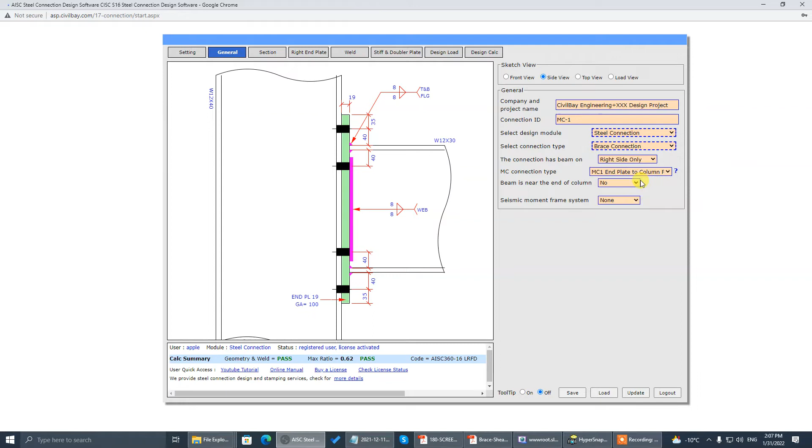We'll do this vertical brace first. Look at this angle: the brace to horizontal angle is 39 degrees, and to the vertical line the incline angle is 51 degrees. We will start and go to brace connection. The brace is bottom only, double angle vertical brace. As I say, the brace line to vertical line incline angle is 51 degrees.

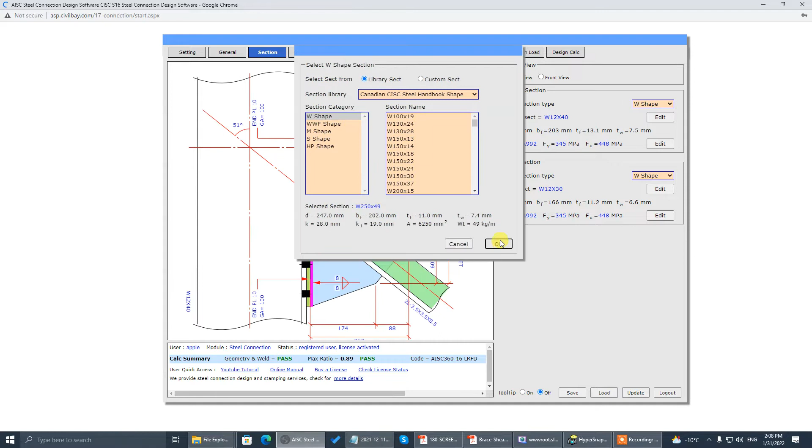Go to section. The column section is Canadian W250x49, and the beam section is W200x36.

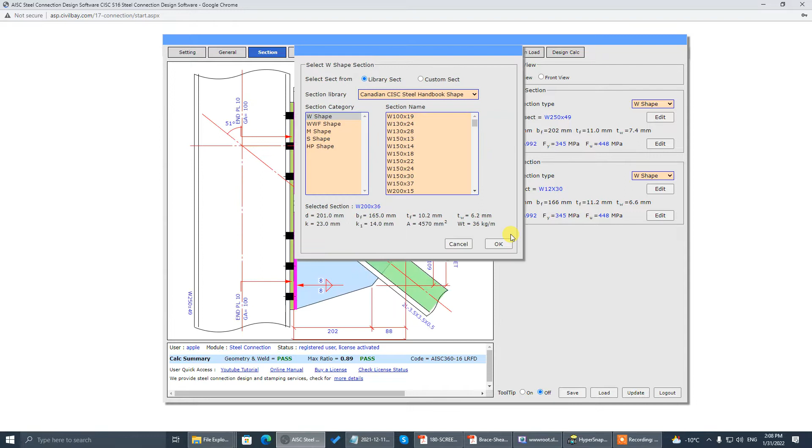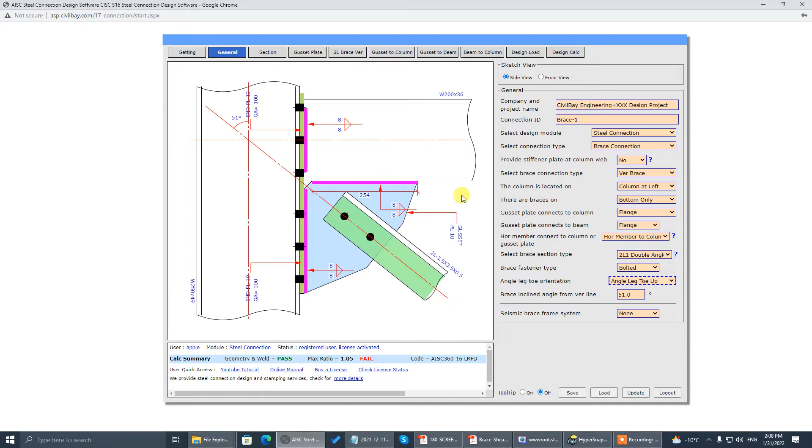Go to general. Basically we want this flange to be on top, toe up, change this one the flange on top, and now go to angle section.

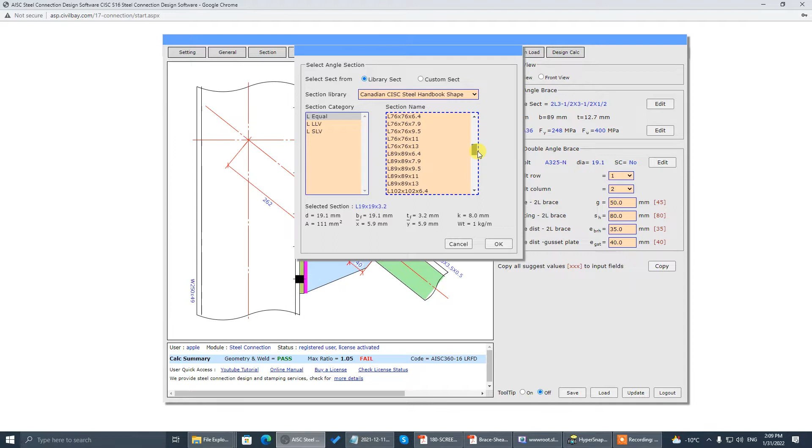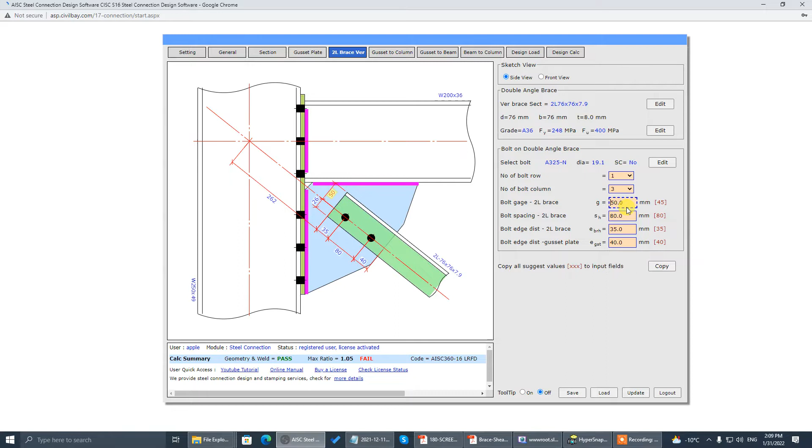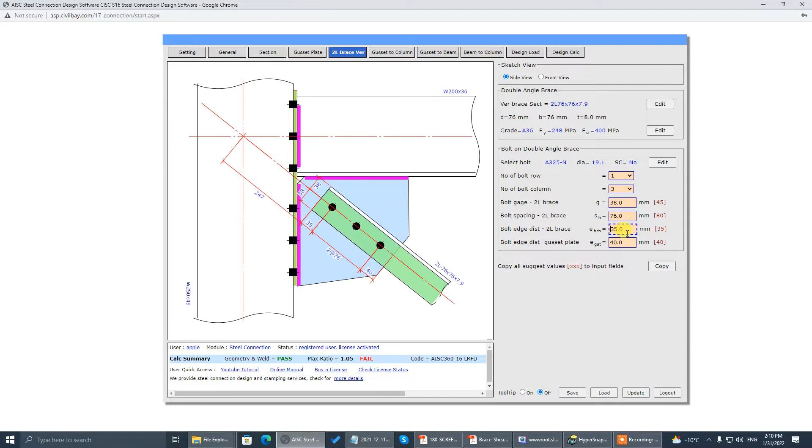The double angles are 76 by 7.9, Canadian section, L76. The gauge is 38, we have three columns, gauge 38, edge distance all 38, and 76 spacing throughout all three columns of bolts.

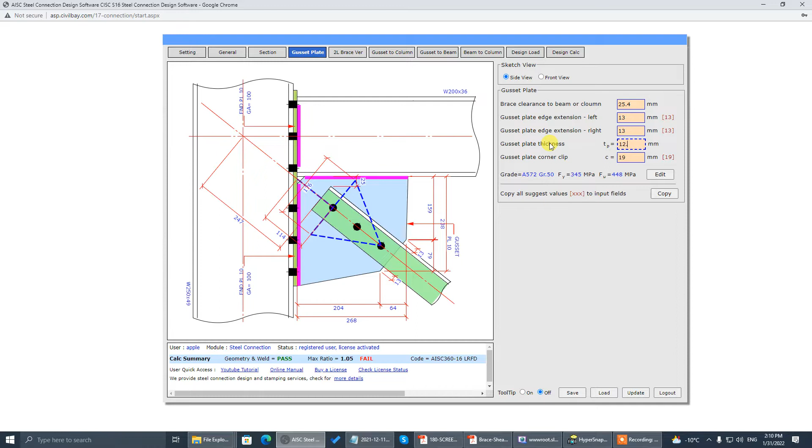Go to gusset plate. The gusset plate thickness is half inch. The edge extension is 13, the clearance is 25. So we copy everything: clearance 25, 13, 13, thickness half inch.

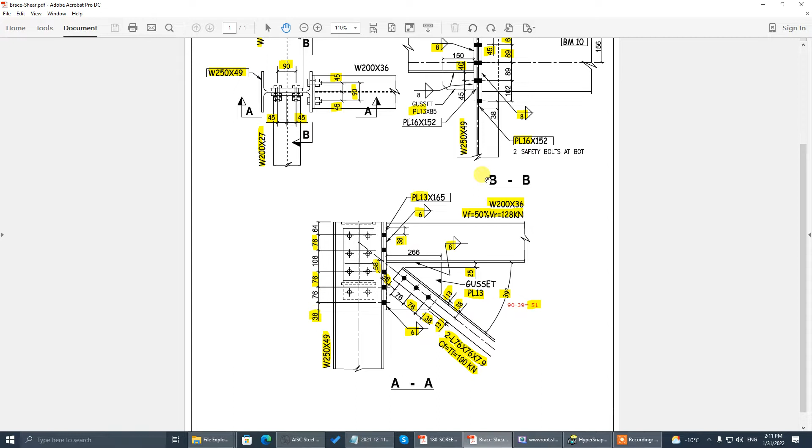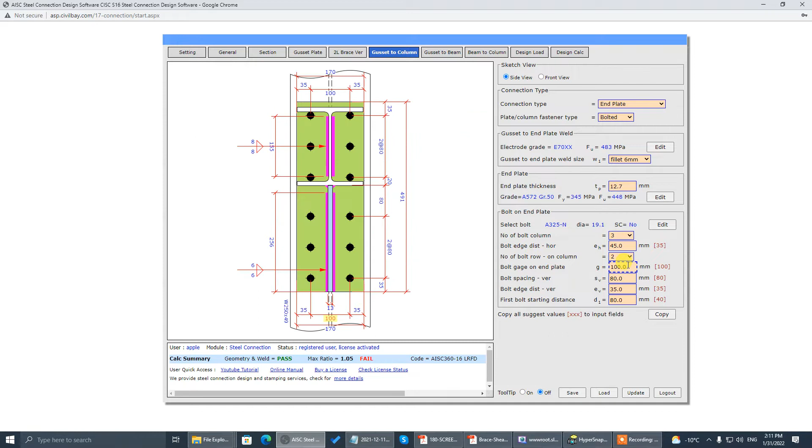Now go to this gusset-to-column connection: three rows of bolts, spacing 76, edge distance 38, gauge is 90/45. The weld to column is 6mm. The end plate thickness is half inch, with 3 rows at 45, gauge 90, edge distance 76, other edge distance 38, and that distance is 58. Update, half inch.

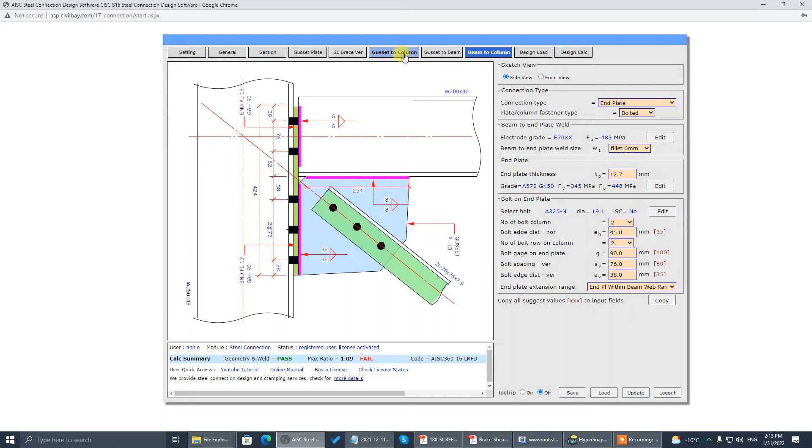Go to the beam-to-column connection. The spacing is 76, 2 rows of bolts, edge distance 38. The weld is 6mm as well, 2 rows of bolt instead of 3. Gauge 90, spacing 76, edge distance 38. Update. Go to the gusset-to-beam connection, we copy: it's 8mm, flush this one, copy this, flush that one.

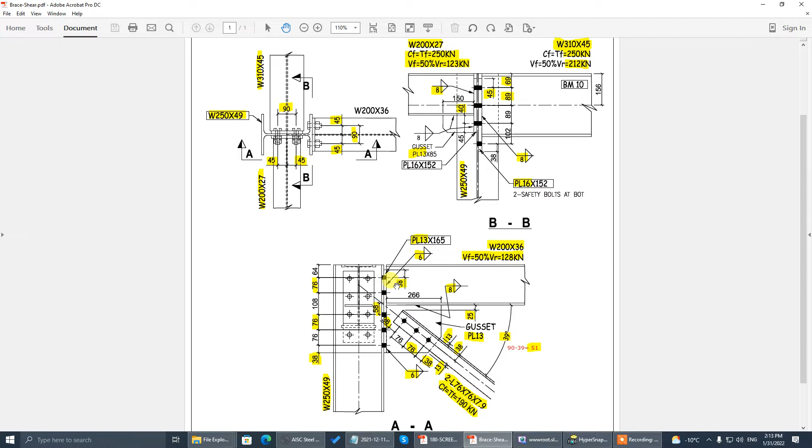Now we input, finish input, AISC connection. We'll input design load: that's 190 kilonewton tensile/compression, and the shear load is 128 kilonewton. Go to design load, clear everything to 0 first: minus 190 tensile, 190 compression, shear is 128. There's no transfer force, no weak axis shear. We update, make it 0.99. So that finishes our design of this vertical brace.

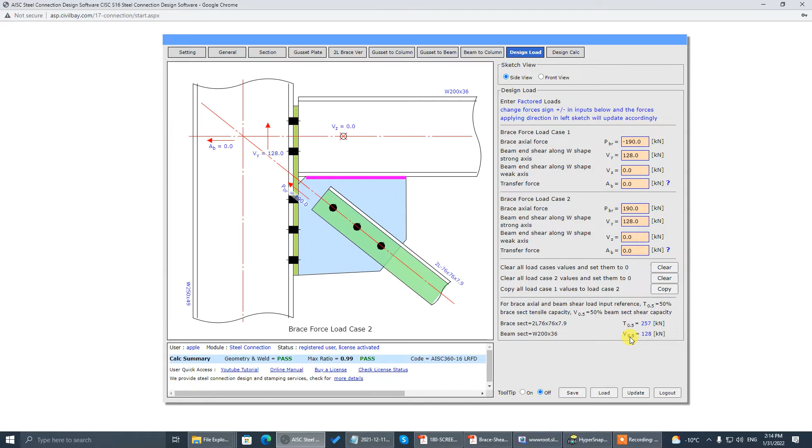So we're going to design this shear connection. Basically it's a 310/45 beam joining the Y-axis of this column to W250/49. Look at these details. We're going to input this bolt - there's one outside the flange.

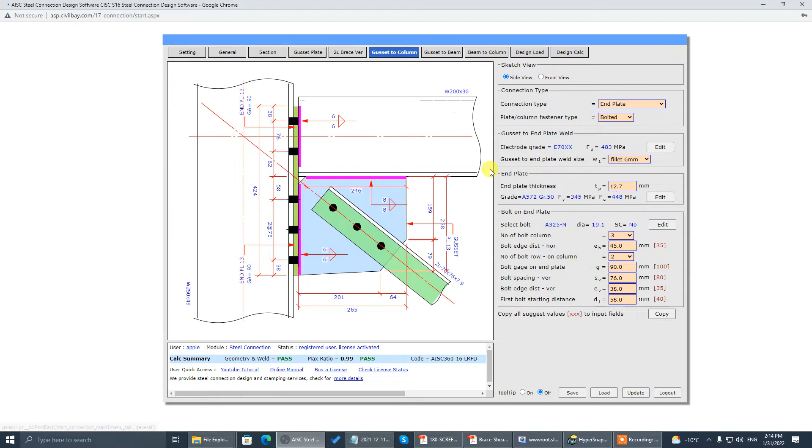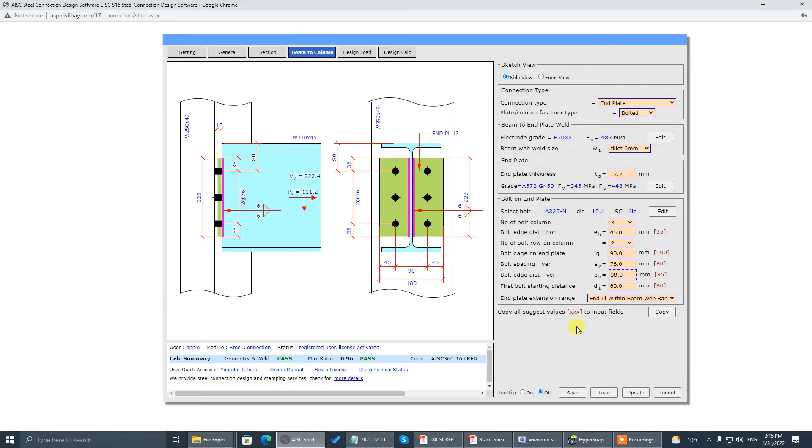So we finished the brace connection. Now we're going to design the shear connection, beam to column web. The column section is 250/49, the beam section is 310/45. Go to here, there are 3 rows, and there's 1 row bottom only beyond the beam flange. Now the brace thickness is 15 to 16, 15.8.

The weld is 8mm on the web, 8mm, 6 on top, that's fine. The spacing is 45, gauge is 90, now it's 89, edge distance 38, other distance 69, and that one take it as 40. No, there's no stiffener plate - that's for a vertical stiffener plate or not, but there's no such provision in the sketch. So we get these values.

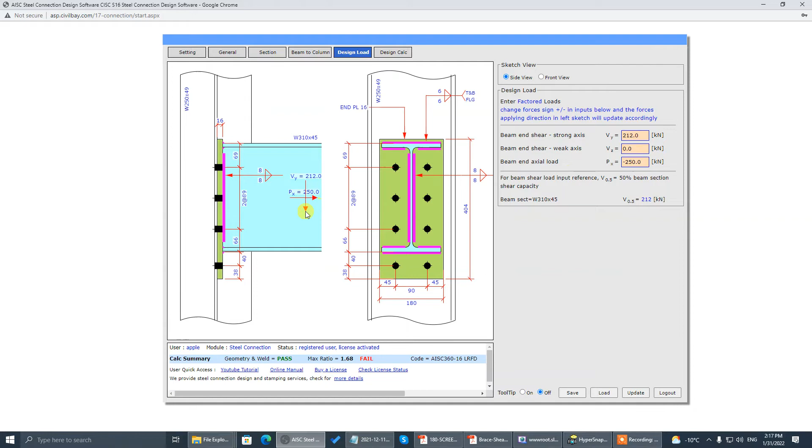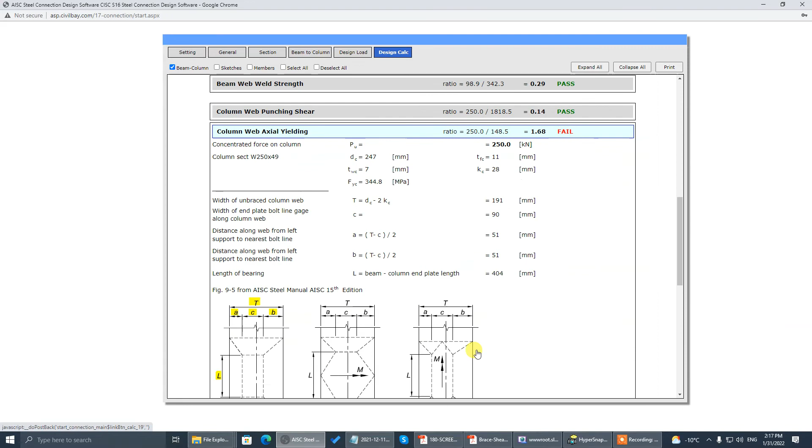Now we have shear load of 212. Compression won't govern, so tensile is 250. We have shear load as 212, Px minus 250 tensile, update. Basically the failure at 1.68 is because of so-called column web yielding - like an end plate case, because the actual tensile force 250 is huge. So the column web axial yielding fails, and we can provide a horizontal stiffener plate and vertical stiffener plate on the other side of the column to waive this check.

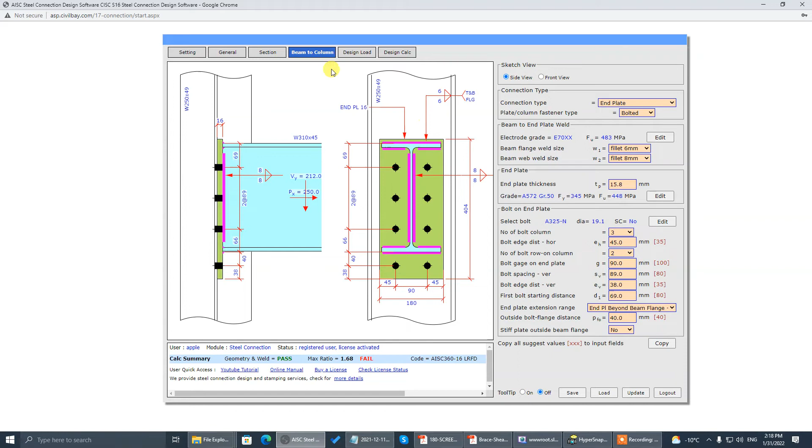So in the column, we can provide two horizontal stiffeners and one vertical stiffener on the far side of this column web to waive this check. So we have one option - once you select this option, put yes. Once you select the option, the design passes. Actually the check is not performed because you have stiffener plates to cut short the span of the column web as a plate. So we finish this shear connection.

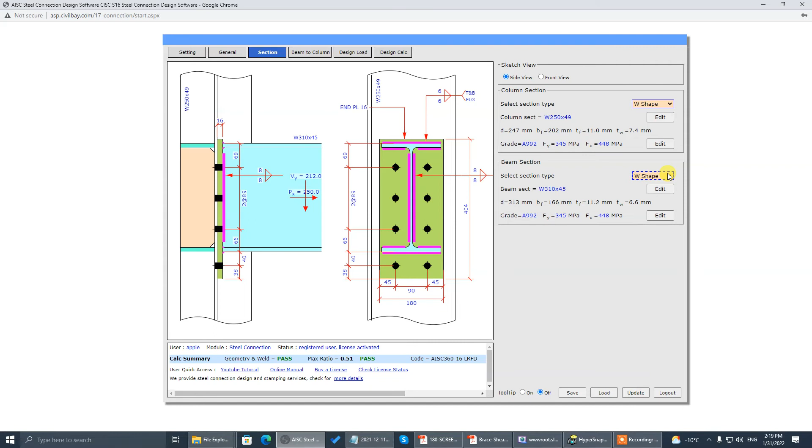We are going to do this shear connection. It's a 200x27 shallow beam, but extend out the bolts with a stiffener plate. So now we're going to do this section - we change the beam section to 200x27.

Now we have only 2 rows of bolt into the column, same column size. It's 2 rows instead of 3. We have one extension and stiffener plate, so these plate thickness now is the same, 16, and that one is 40.

It's 90, 89, yeah that's correct, 38, 38, 69, that's correct, 40. So now we have a shallow beam with stiffener downward, one more row of bolts, weld is 8.

Go to design load. Now this one is tensile, same thing, 250, and the shear now changes to 123 instead of 212. So shear is now 123, 250 tensile, update.

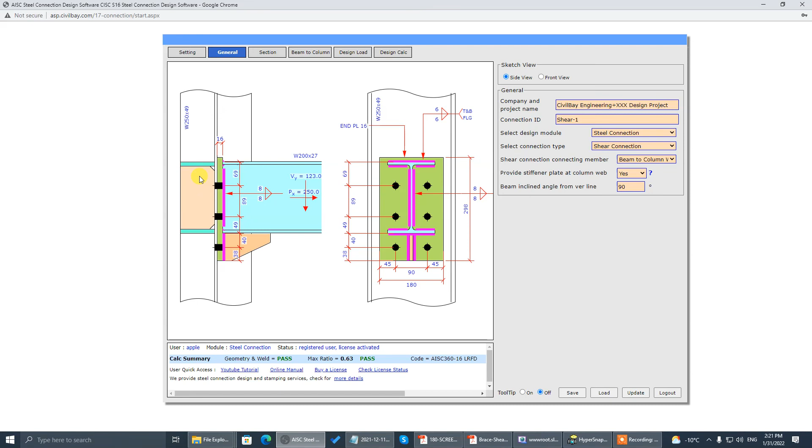Same thing - you need to provide the stiffener plate, horizontal and vertical, otherwise you get column web axial yielding failure. So you need a stiffener plate. In our case, we have both sides being pushed against this column web, so we can treat this beam as a stiffener plate to stiffen the far side of the column web. If it's one side only, you can add a stiffener like this.

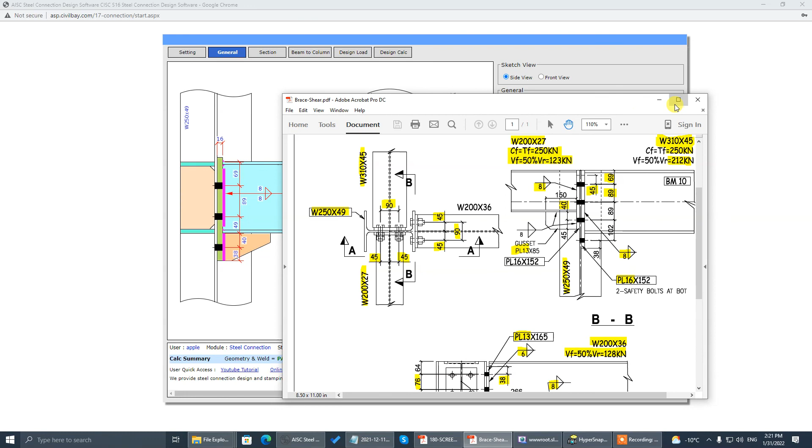So we finish one vertical brace. Look at this way: one vertical brace, and there are two shear connections, end plate shear connections, connecting to the column web.